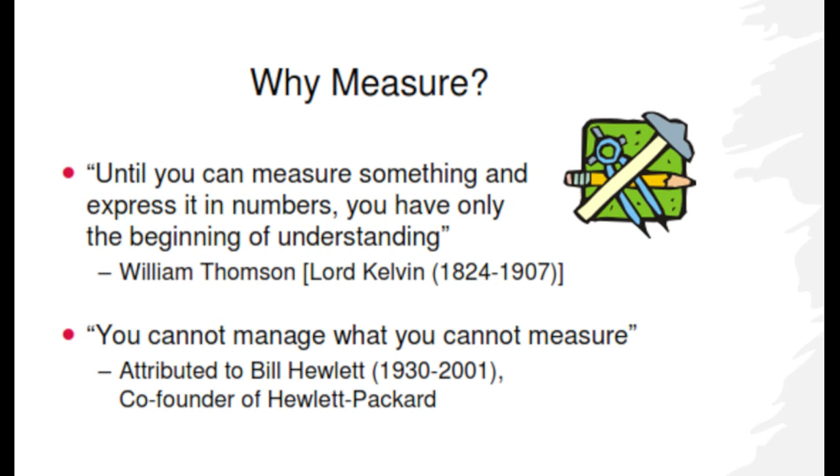So the other quote says you cannot manage what you cannot measure. That's quite true, in the sense that in management, we need numbers. A number is actually a measurement - how are we going, how fast, how much more do we need to go, and so on and so forth.

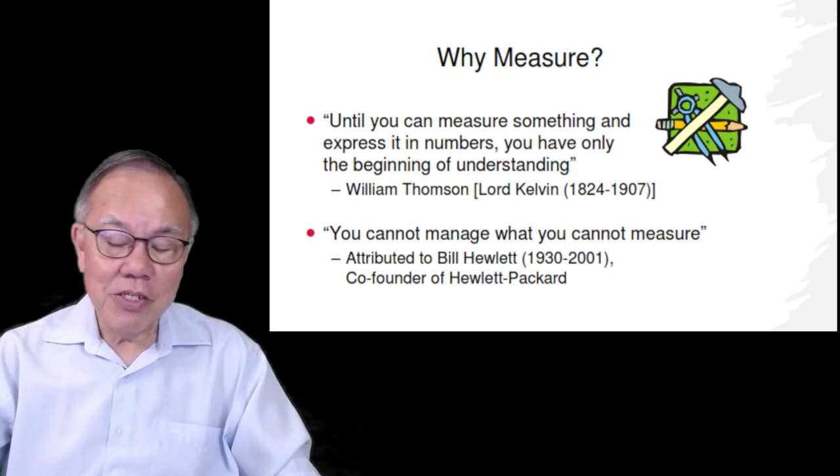So that's the reason why we need to measure. The purpose of measuring is to gather relevant information to enable managers to make informed decisions and drive continuous improvement in support of corporate goals. The whole purpose is to enable the manager to make decisions based on information. Of course, this information must be gathered somewhere - it does not automatically come, and we need to decide what KPIs we need to have and so on.

Of course, this morning we are talking about maintenance metrics - not production metrics, not business metrics, but maintenance. So maintenance metrics in the form of KPIs will help you measure and drive your maintenance performance. In other words, we are talking about the maintenance function - we need maintenance metrics, and what are some of these metrics?

If we can fine tune our maintenance performance, then it can improve the organization's performance. In order for us to fine tune, we need to know where we are going, so that we can increase profit, lower cost, and so on and so forth.

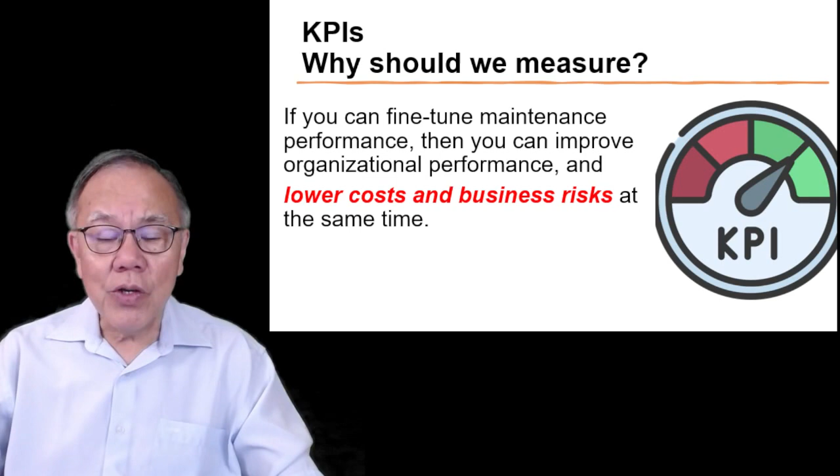Now, there are actually a lot of what we call maintenance metrics - I can give you a whole list of them. You can go for maintenance backlog, MTTR, MTBF, OEE, compliance percentage, work order cycle time, maintenance cost, unscheduled downtime, and so on.

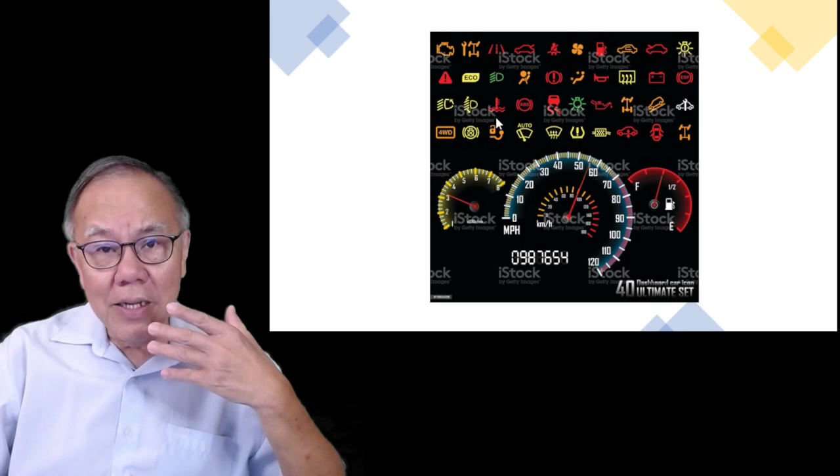If you were to look at your car, there's a lot of information that the car will pick up. But the question is always this - what are the key important things, so that you can put it right in front of you, so that it will help you drive to your destination, to get where you want. In other words, we need to just pick up some of the basics, because there are too many things out there, and we're not going to be bothered with all the minor things - although they are important, they may be running in the background, but we don't need to have it in front of us.

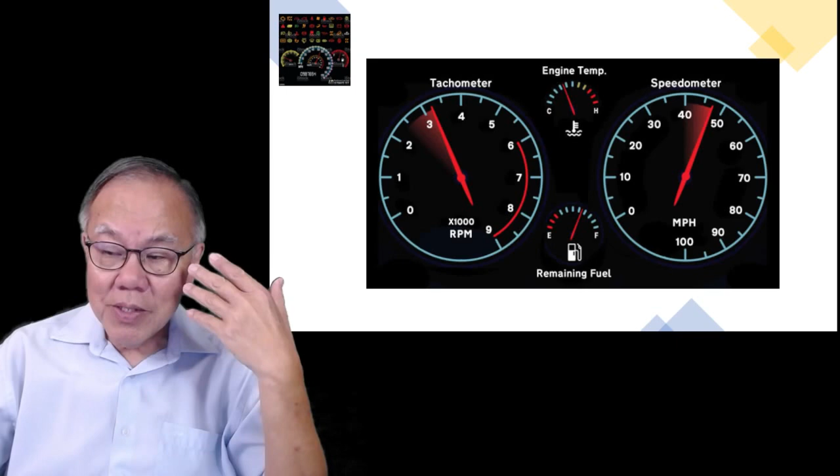So what are some of the things that we need to have in front of us? That's what we want to talk about this morning, and for that we're going to give you 5 key indicators this morning - that's all. Some of the others may be better dealt with at another time.

What are these 5? We're going to look at downtime, PM compliance, PM percentage - how do you actually measure them? And MTTR and MTBF, mean time between failure, and OEE - what it's all about. For some of you, these could be quite new terms, depending on the industry you're coming from.

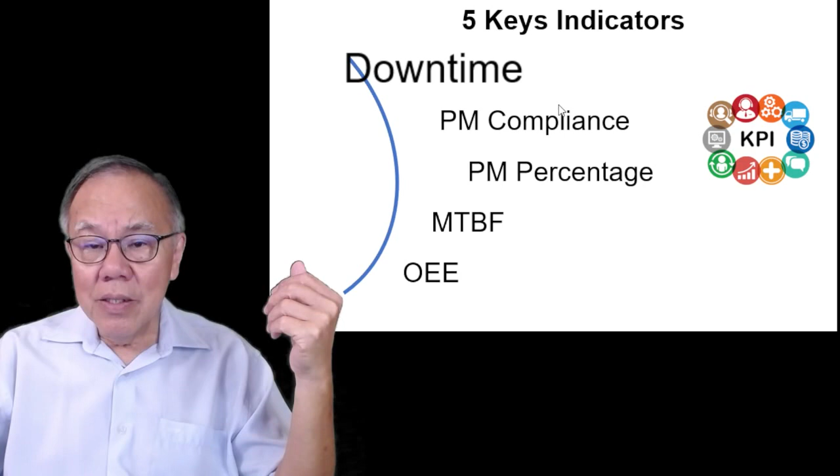Now, a very key indicator is actually downtime. Now we are talking about unscheduled downtime. There are a lot of downtime, but not all downtime are unscheduled. Some of the downtime are actually scheduled.

For example, downtime means the equipment is not performing, in other words, the equipment is not providing output. If your machine that you require to have output is not producing. Now some of this downtime are planned, some are unplanned. So unplanned is what we call unscheduled.

Planned downtime is okay, in the sense that we plan for it. Everybody knew about it, everybody knows it, so we do it. It's planned, everybody is happy. But whereas unplanned downtime, everybody jumps. Why is there downtime? Because unscheduled downtime disrupts a lot of things.

So unscheduled downtime basically is the amount of time that the machine is down over your scheduled time. For example, if you schedule your production from 8 to 5, minus all the break time and all that, you've got about maybe 8 hours of production time. If you've got 1 hour or 60 minutes that is down, then you have 60 minutes over 480 minutes, that is 8 hours. That will give you an indication how good the machine is, or how much downtime you have. So again here, just remember, we're talking about unscheduled downtime.

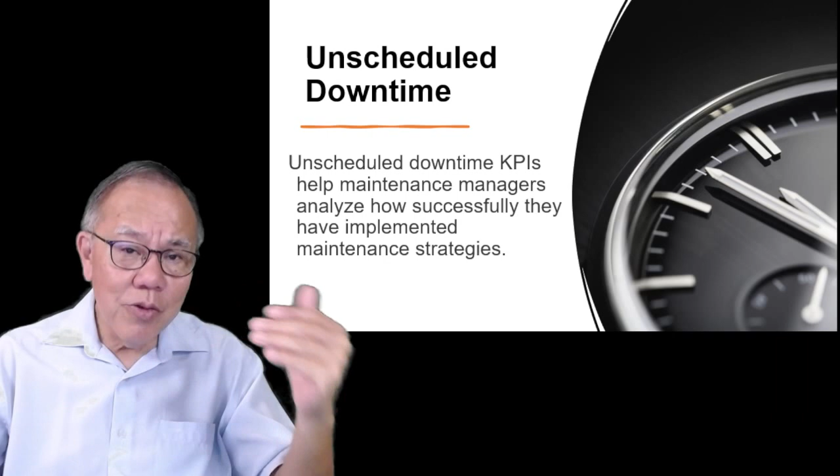So unscheduled downtime KPI helps the maintenance manager to analyze how successful they have implemented the maintenance strategy. Whatever maintenance strategy you are putting into place, is it working or not working? If you have a high downtime, then you know that you're in trouble. If you have a low downtime, then you know that whatever you're doing is good in a sense. It's good, it's performing, and you have no problem with it.

So let's say for example this week you have 10 equipment that you need to service, or need to plan for doing maintenance. You have 10, and out of the 10 you only can do 8. So your compliance is actually 8 over 10. In other words, you couldn't do everything, you couldn't do 10 of the jobs that were scheduled because of lack of manpower, maybe you have a breakdown somewhere, you got other disruption. So you couldn't do it.

So basically, we are looking at PM completed within time frame. In other words, how many PM you have scheduled, how many you actually have done, or how much you have done versus scheduled. That will give you an indication of whether you are complying or not complying. Sometimes we can plan to do things, but actually we did not do them. That's what compliance is - you say you want to do it, you do it. If you say you want to do it but did not do it, then you default. So you go on the default system. That's what compliance means.

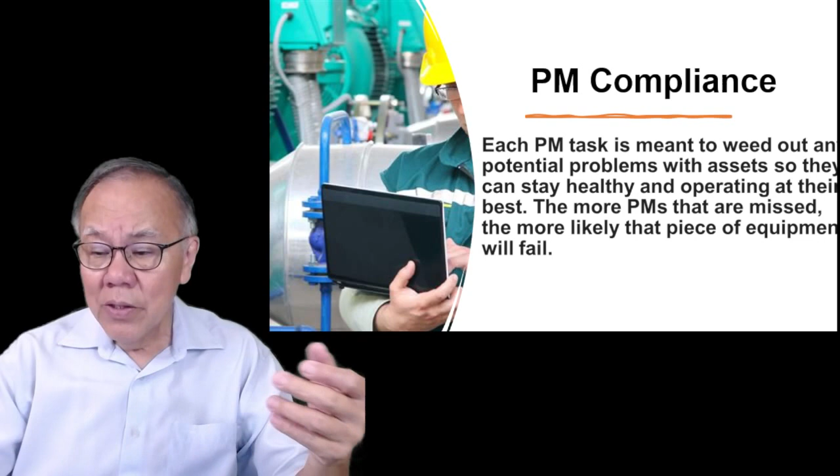Just like our car, we plan to service it. If you don't do it, there's a good chance it will break down somewhere along the line. So that will help us to think. If you plan to do it and you did not do it, don't be surprised if the thing breaks down.

Now the other one is what we call PM percentage. PM percentage basically means the scheduled maintenance time over your total maintenance time. Out of all your maintenance activity, how much of it is scheduled maintenance time? This metric tells you how much maintenance work done on a particular asset was part of your preventive maintenance versus how much time you have spent repairing it.

In other words, if you can gather this data, then compare it with your downtime on this machine, you ask yourself: what is the amount of time I spent planning to do it against the amount of time I actually spent repairing the machine? So if your maintenance activity means every time you touch the machine, there's activity, and every time you touch the machine, it's either planned or unplanned. So how much of this is planned over unplanned?

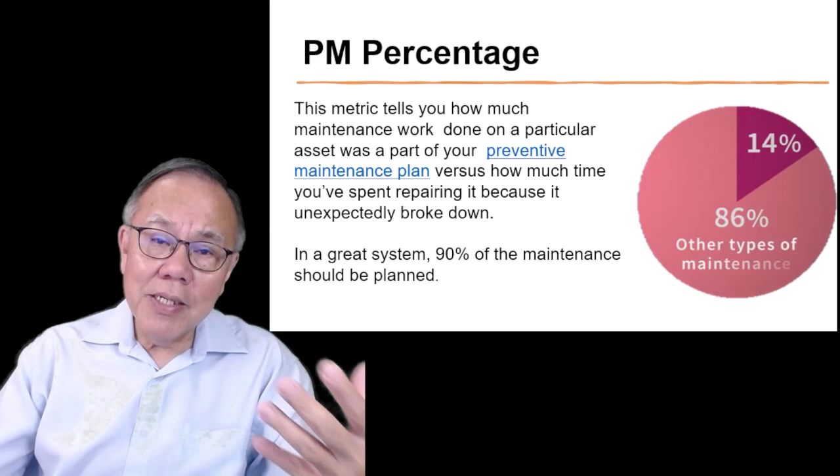Now the other one is what we call MTBF, mean time between failure. MTBF is the average time between the failure or breakdown of a critical system or machine during regular operation. That's the interval. Often MTBF is used to create a preventive maintenance schedule for equipment and assets, to ensure service is performed before a likely breakdown.

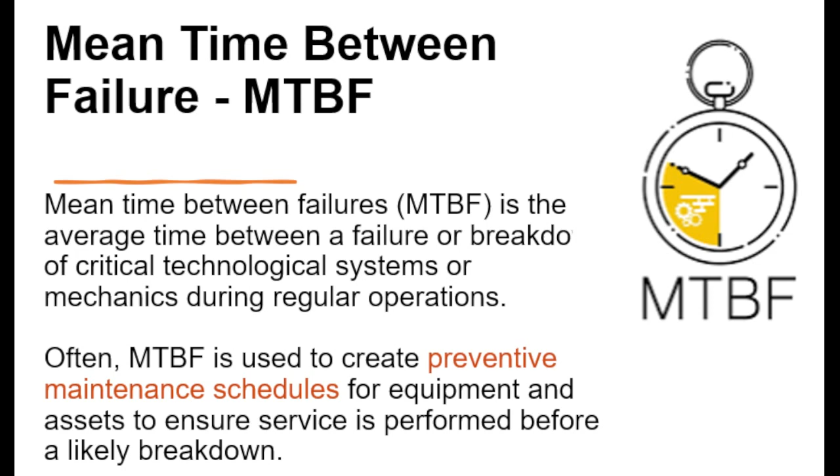So what it means is, let's say if you operate a machine over the week, in terms of days. If over 5 days, or let's say over 2 weeks at 5 days a week, you've got 10 days. Let's say over 10 days, for example, you have 2 breakdowns over 5 days. So you're talking about every 5 days you have a breakdown. That's the mean time between failure.

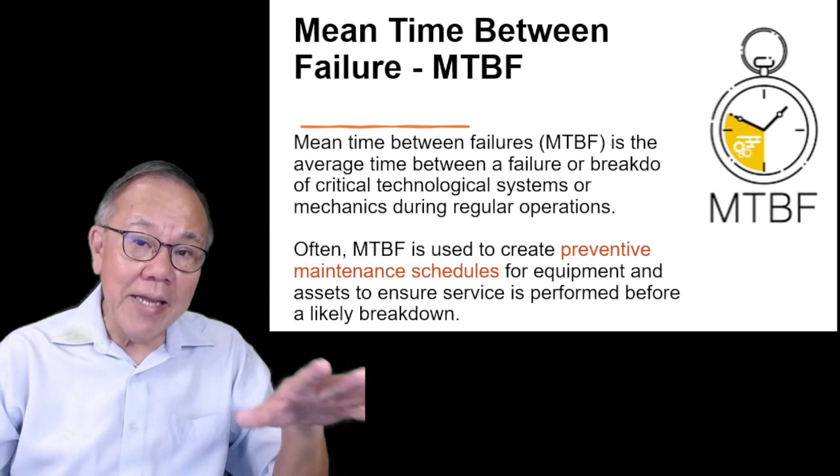But instead of 2 breakdowns, let's say over 10 days you have 5 breakdowns. So then you have 10 over 5, 10 being the working days. Basically, the measurement is this: the total time in the period over the number of failures.

Let's say, for example, if you have 10 days and 5 failures, it's like every 2 days you have a breakdown, which is not very good. So in other words, the higher the number, the better; the lower the number is not so good. This will help us determine how often you should actually service your equipment. If your equipment is breaking down very often, then your schedule period should be shortened.

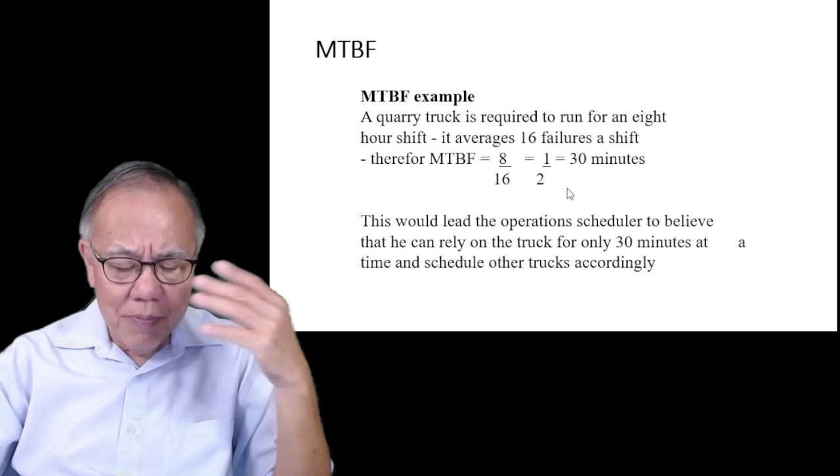But some of the drawbacks about MTBF - one, it is a good indicator, and a lot of maintenance managers are using it. Now, I don't want to go into the calculation, but basically here's an example: a truck that runs for an 8 hour shift and has 16 failures. So it's like every half an hour you have a breakdown. That is actually MTBF.

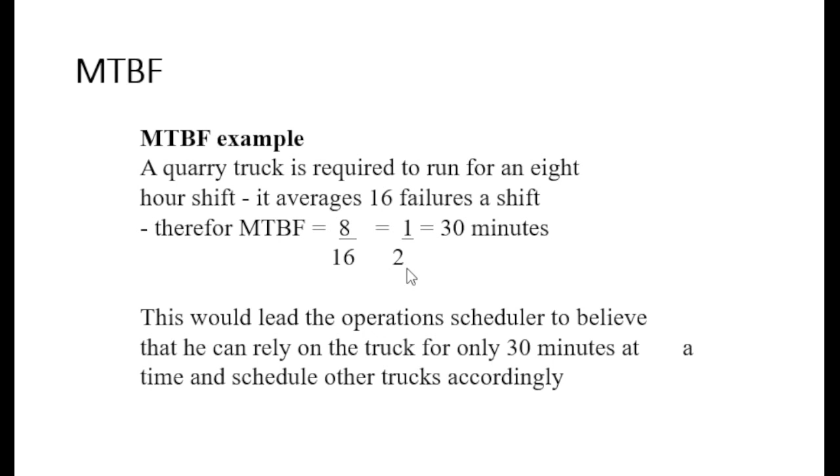But some of the drawbacks about MTBF are this: let's say you look at this chart. Over 8 hours, you have 16 failures. On the 7th hour, failure is 8 times you break down. On the 8th hour, another 8 times - so 16 times total. So the only problem with MTBF is sometimes it doesn't tell us a lot of the story, in the sense of what sort of breakdown it is. Is this 16 times of breakdown all the same, or different?

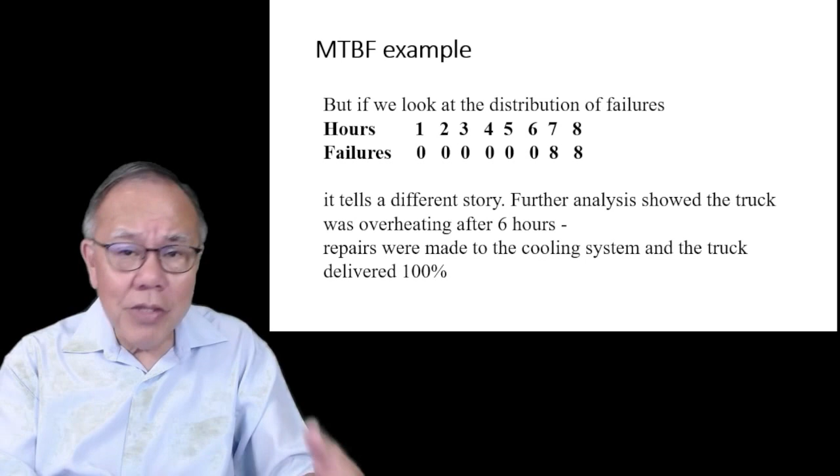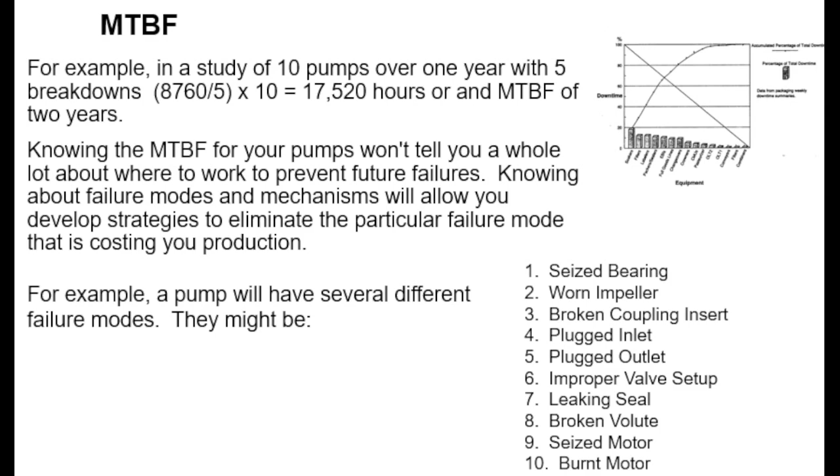Just like your car - is it every time the battery problem, or sometimes the engine problem, or is it all the time the engine problem? For that reason, sometimes it's good, instead of just calculating the MTBF, to actually log the type of failure, which should help us move into what they call failure mode. If it's a breakdown because of a seized bearing, for example, or because of a worn impeller, then it will give us more accurate information on why the thing broke down.

So sometimes, like our car, we feel that the car breaks down every 5 days and gives problems, so we send it to the mechanic. But if every time it breaks down it's a different problem, then you think it's a different issue. But if every time it breaks down it's the same problem, then you're sort of compelled to say, look, this problem we need to fix up.

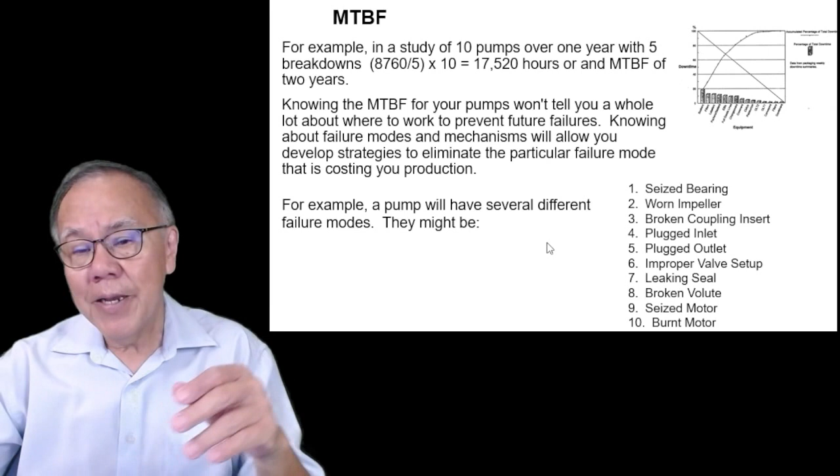So here is another example, but I think we will not go into this. We're not going to this.

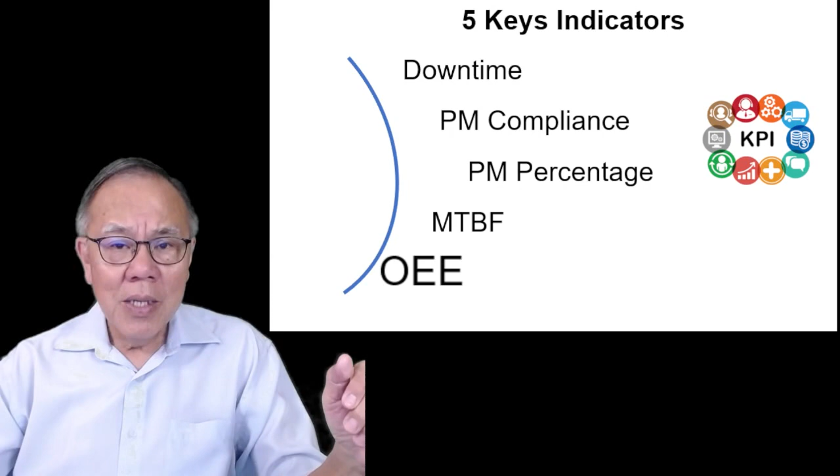The next one I want to talk about is actually the OEE. Again, depending on the type of industry you are from, you may not have heard of it. OEE basically means overall equipment effectiveness.

Very often we say, look, the important thing is do the right thing. The difference between efficiency and effectiveness is this. Let's say, for example, if you...

Just like the picture said, you see the bunny have a speed boat, can go fast. But if you go in the wrong direction, you actually get it wrong.

So sometimes we do things very fast. Your machine can run very fast, can produce a lot, and you can produce 100 units per minute. But if 50% of the units produced are defective, then we've got a problem. Yeah, so it's efficient but it's not effective, because everything you produce you need to rework, so you spend more time trying to rework. That is actually what OEE is about.

Sometimes I run a course over 2 days on OEE and all that, how to maximize the equipment for OEE, but here is just a summary. It's a quantifiable way to find out how well your equipment, your people, and process do the job, because OEE takes into consideration the availability.

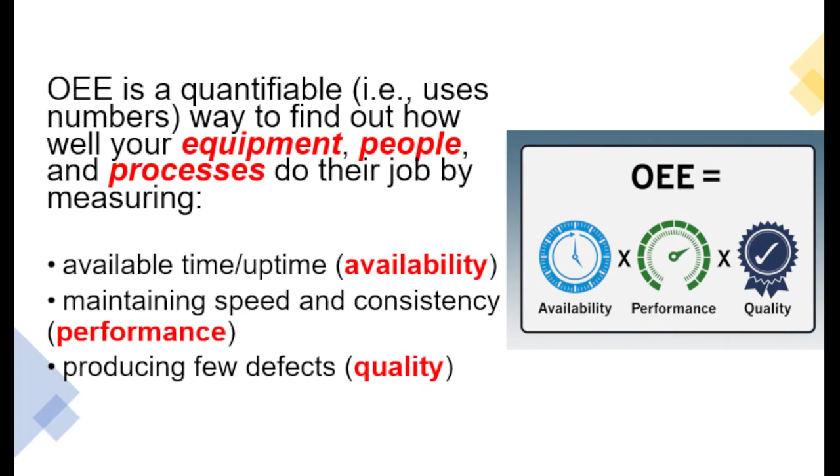If you get the machine, let's say for example, you're supposed to run the machine to give you 100 units per minute, and you're only running 80 units, so you see your performance is lacking.

You're not actually performing. And also the quality: out of all the things that come out, if it doesn't pass quality criteria, it has to be a reject.

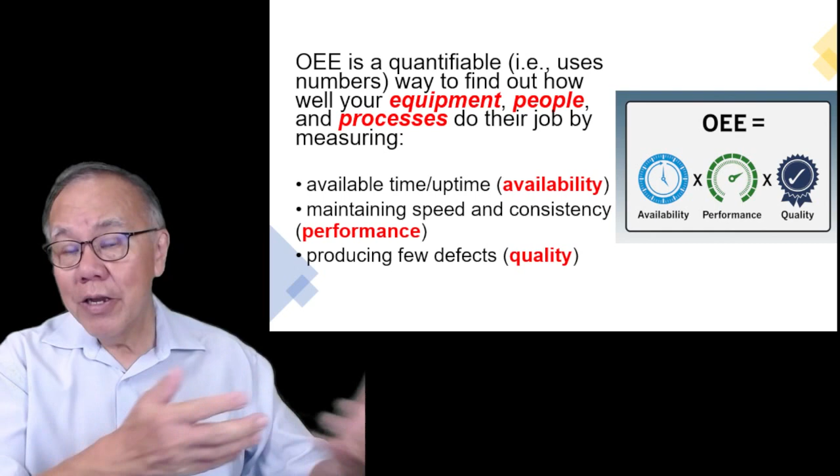So OEE takes care of three components: availability, performance, and quality. Availability is uptime over the scheduled time of production. Performance is how much goods come out over what is your target for the day.

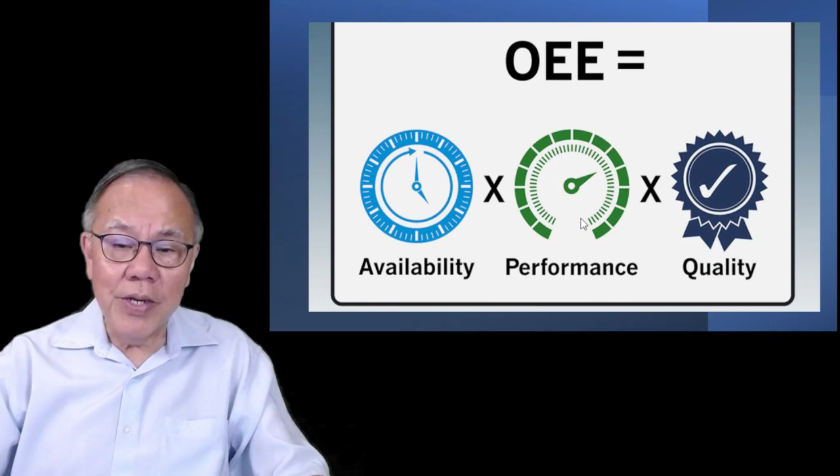So your expectation is 100 units, you only got 80 units. And then out of that, how many of them do not pass the quality rate? So in the OEE calculation, there's this metric just to highlight that availability has to do with...

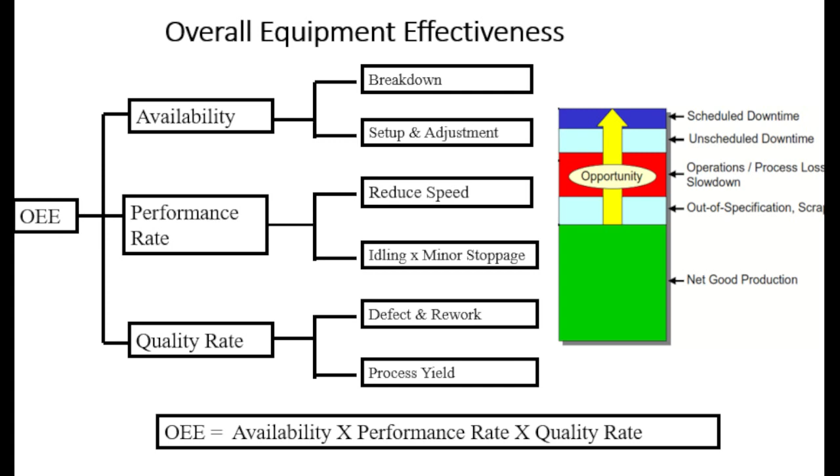breakdown and adjustment, performance has to do with reduced speed and idling. Sometimes the machine is not breakdown, but basically there's no output coming out. Why? Waiting for material. So there are minor stoppages, the machine stops, but it's not breakdown, yet no product is coming out.

So it sort of affects your production rate, because no production is coming out, but the machine is also not down. So who is going to be responsible for that time?

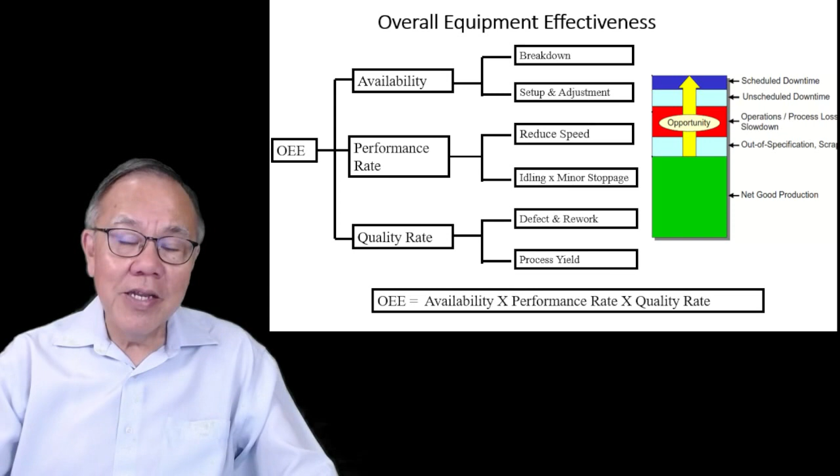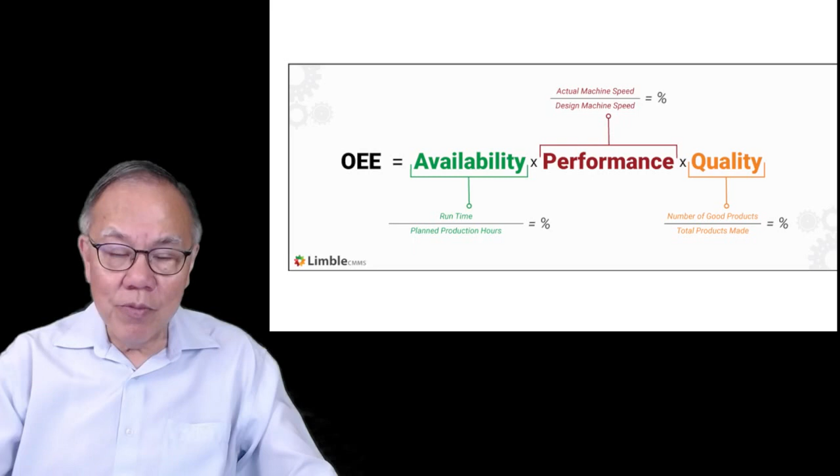So again, that's OEE. Quality is more straightforward: how many of them actually pass the quality rate? This is some of the breakdown I'm trying to show you. Performance has to do with machine speed, availability has to do with equipment downtime, quality is quite straightforward.

So OEE gives you a way to assess how close the process is, and also gives you direction on how to improve it. Now, the good thing about OEE is that, like I showed you, there are three components: availability, performance, and quality rate. If you do the calculation and get a very low OEE, you look at the three components...

and say, look, which component is actually impacting your OEE? In other words, which of the components, whether it's availability, performance, or quality, is actually having an impact on your reduced OEE—in other words, the amount of real product that actually comes out.

And from there, we can actually do something about it, so we can make improvements and all that. It helps you to break down where losses or issues happen, so that you can fix it. So it provides a diagnostic tool for your production process too.

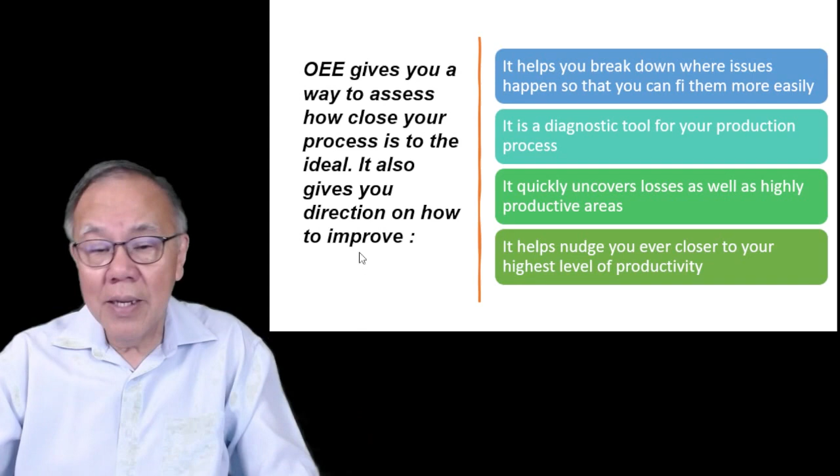It quickly uncovers losses as well as highly productive areas. It helps nudge you closer to your highest level of productivity. In other words, it tells you whether you're getting the best out of your equipment. If not, okay, now let me give an example.

Just roughly, let's say for a production shift you have 480 minutes per shift on a machine rated at 100 units per minute. So basically, you will expect 48,000 units to come out from the machine. But actually, it comes out as 32,000 instead of 48,000.

And your speed is actually now reduced to 98 units per minute. So the question is why? You have unplanned downtime of 82 minutes. What happened to the machine? Then you have bottleneck losses due to breakdown, another 30 minutes.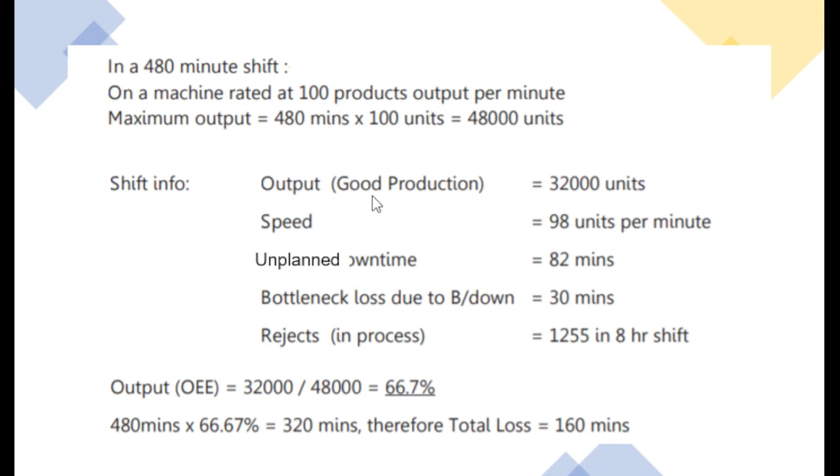So if you do all the calculation, you can get your OEE, in this case about 67%. So what it means is you could actually produce another 36 or 37% more production if everything is running at 100%. So let's say for example you have an OEE of 50%. What it means is, instead of buying a new machine, you can actually improve the machine so that you can achieve the production you want without buying another machine. That's the power of OEE. Okay.

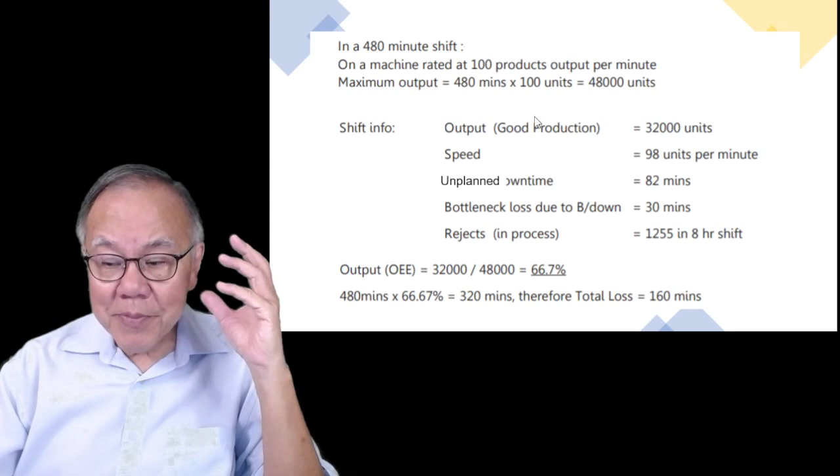So above all this, we need to capture data. And how do we actually capture data? One good way, of course, is computerization today. If, for example, you have a CMMS, a computerized maintenance management system, you know, all computerized systems are basically in digital form. You store a database that keeps track of your machine downtime, machine parts, work orders, how many work orders you have, how much downtime you have, how much uptime you have. So a good CMMS will help you somewhat to get the data from it.

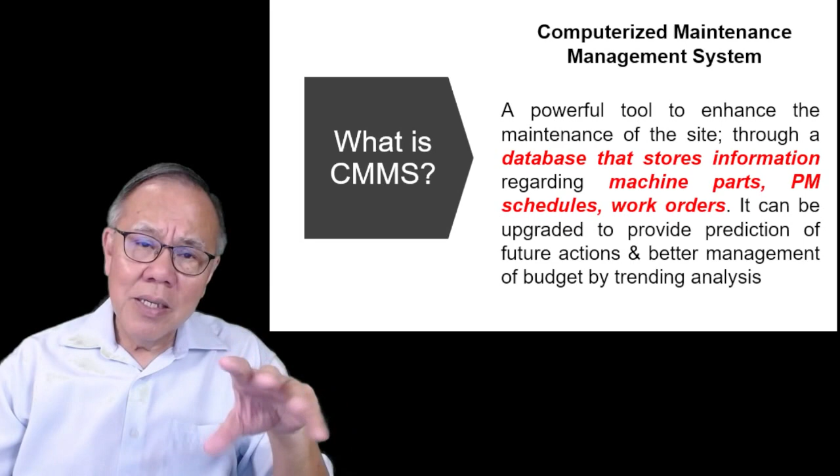So try to utilize a CMMS that may give you data on breakdowns and help you calculate your OEE. Of course, CMMS also has a reporting system function, which allows managers to drill down. What about only this plant? What about only this equipment? What about only this section? What about only this department? Where is the problem? So that you can drill down and find out exactly where the problem is that you're trying to fix in order to enhance your overall performance in the maintenance department. A CMMS will be a good candidate for that.

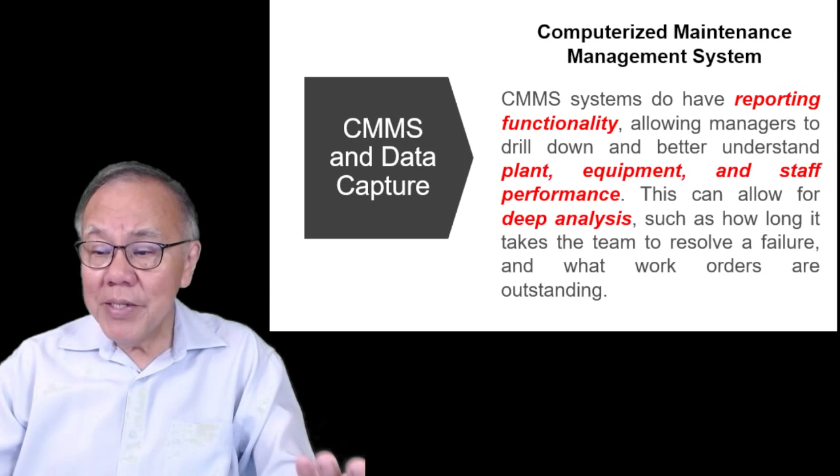So CMMS systems do have a robust data set on machine utilization. Utilization basically includes your uptime, downtime, MTBF (mean time between failure), OEE, and so on. This will help the maintenance team establish benchmarks and prioritize their maintenance strategy and function to make maintenance improvements.

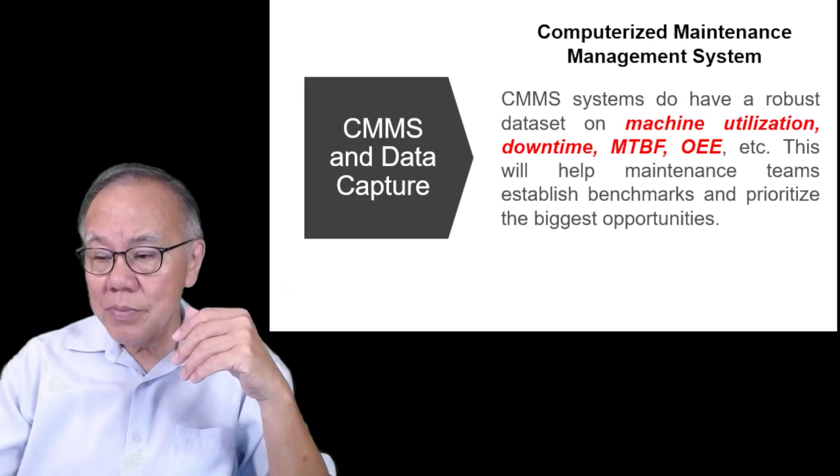So in summary, whatever KPI or maintenance metric you choose, some of these questions will be good for us to see whether we are on the right track. Does the KPI support the business objective? Because your business objective is always production quantities and delivery - if you're short on that, you cannot deliver.

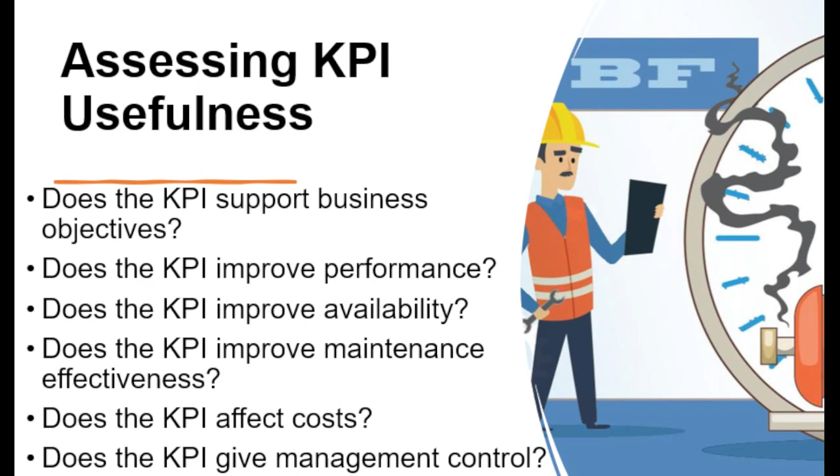Does the KPI improve performance? Does it actually help you improve your equipment performance? Does it improve availability, which is your downtime and uptime? Availability eventually results in your total output. Does the KPI improve maintenance effectiveness, which again relates to your OEE? Does the KPI affect cost? Does it give management control? These are some good questions for you to think through as you select whatever KPI you use.

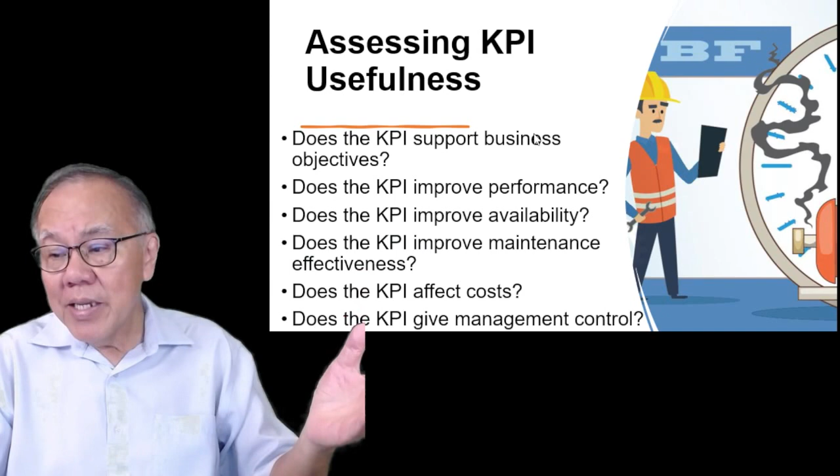So KPI is used to track maintenance performance. How are you going to measure your progress? If you don't have any KPI at the moment, nothing - how are you going to measure your progress? What KPI will be good? How would you like the KPI to influence the outcome? In other words, how are you going to make your KPI help you make improvements so that you can zero in and drill down? How will you know if you are successful? Sometimes we implement programs and don't even know whether they are working or not. So if you have a good measurement system, it will actually help you do that.